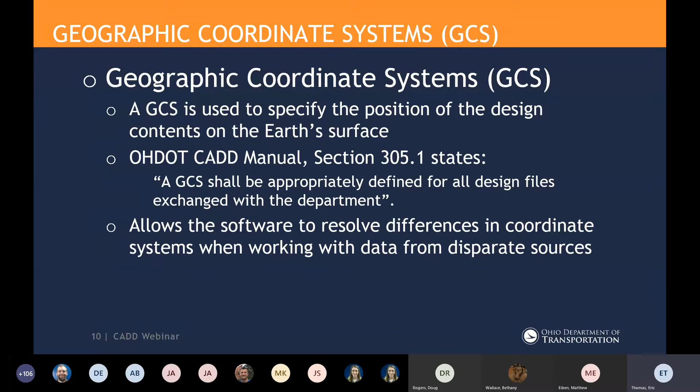If you're not sure about the GCS itself, in the Create Workset application there are three options. There's no GCS, typically used for a project that's been mapped to ground, in which case you'll have to define a custom geographic coordinate system with a scale factor to scale from the grid to the ground. So you have an option for no GCS, Ohio North, or Ohio South.

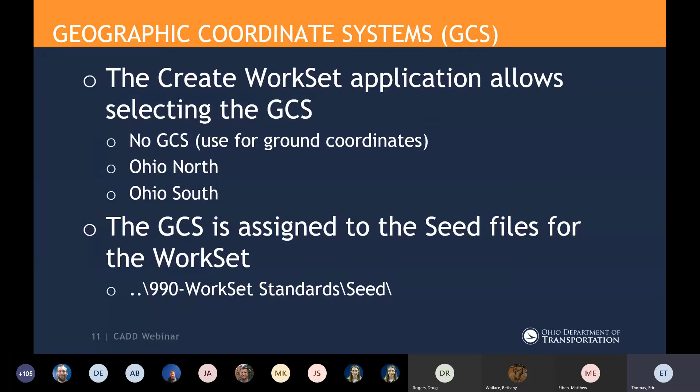When the workset's created, that geographic coordinate system is assigned to the seed files for that workset, stored in the 990 workset standards seed folder. Within ORD itself, under the drawing tab, utilities coordinate systems is where you can review or assign that coordinate system information. The bottom line is if you're not sure about this when creating a workset, communicate with the district survey operations manager before you create that workset.

Get the input from them. Is this going to be on the grid? Is it going to be on the ground? Should I be using the no-GCS option and assign a coordinate system for the ground coordinates, or am I going to use one of the Ohio North or Ohio South coordinate systems?

We just want to emphasize that this is something expected to be done on all the work sets, and then the design files would use the seed file for that work set with that GCS defined.

One thing a lot of users aren't aware of is that once that GCS has been defined, in the view attributes in MicroStation or ORD, there's an option to enable a background map. You do have to have a GCS defined for this to work, and it's just using Bing Maps. I don't know how up to date those maps are, but it's a nice option to have available just to show a quick background map.

You've got an option to show the street map, a hybrid, or just the aerial mapping. Again, that's just in your view attributes in MicroStation or in ORD. And if there's a geographic coordinate system defined, then you can use this function. It's not available without a GCS defined.

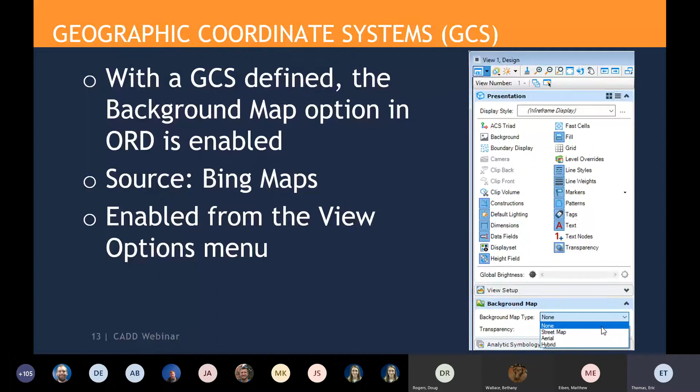So I'm going to shift to creating design files. A couple things we want to talk about here. Again, in our Ohio DOT workflow is where you'll find that Create Design Files application. This is good for inside ProjectWise or externals who may not be using ProjectWise. It'll function inside or outside of ProjectWise.

This is set up to facilitate a federated workflow. By federated workflow, we just mean a united federation of design files here that are all going to be tied together through reference attachments. So federated workflow means we're using multiple design files for our project data.

By splitting this stuff up, we just have smaller files. We don't have a huge file with everything in one file that's going to slow down performance. Of course, MicroStation files are single user access, so this allows multiple users to work on the project, working in different files. If something does go wrong with a file, you're not going to lose everything - you're just going to have that piece of information that would need to be restored from a backup.

When you're talking about federating the files and figuring out what file should I be putting the information in, the various base maps are kind of your roadmap for that. You're just going to look at the available base maps, and if there's a base map for it, that's typically where that information should be stored. And then of course we use references to tie all this information together.

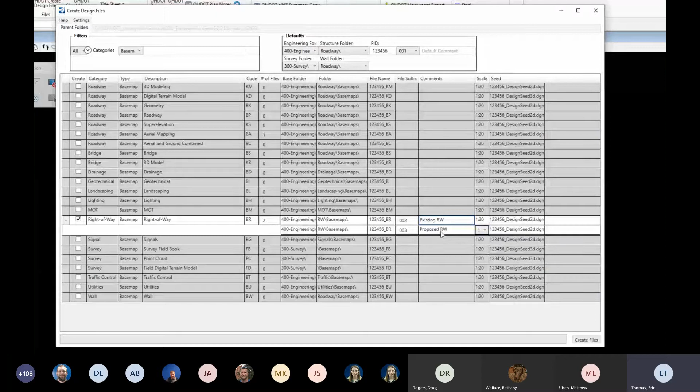The last thing I want to mention is just under settings, there is an open last created file option. So if I turn that on and it creates these two files, it's going to open the last one it created when it's done processing. So it's just a quick overview of a few tips on how to use this dialog to create files, and again, thinking about a federated approach and splitting our information into multiple files.

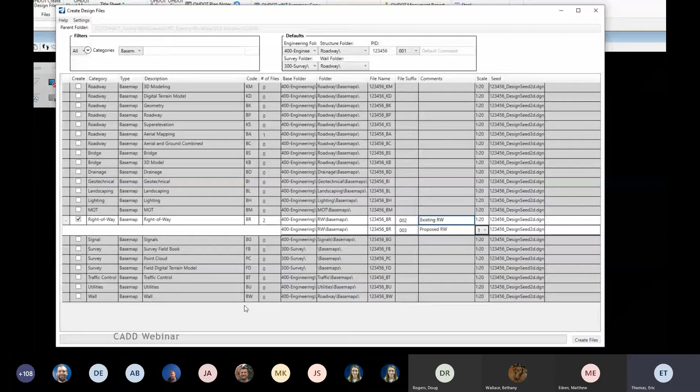So I just want to review a couple of the file types. We've seen a little bit of confusion over what should go in the files. I'm not going to go through every different base map type, but the commonly used file types are survey base map, our field book, our FB file, and that's in the 300 survey base maps folder.

This is going to contain the field survey mapping information, and it could contain the terrain model, just depends on the particular project and whether they decide to make the terrain right there. Or sometimes we see people use the FD file for a field digital terrain model and create the terrain model in that file. That's typically done when you've got multiple sources that you're combining together into the terrain. So you'll make that separate FD design file and then combine those terrains together in that file.

In this survey base map, the intention is that this is the survey mapping. We're not expecting to see alignments, right-of-way, parcels, or any of that type of information in the survey field book file. The alignments should go over in their own files, and right-of-ways and parcels should be contained in right-of-way related files. So the field book is a common file.

The next one I have is the geometry base map, the BK file, and that one's in the 400 engineering roadway base maps folder. The typical recommended convention is one alignment per file. In training, we usually say if you've got just a small project with a couple alignments, it's okay to put them in the same file, but the general convention would be one alignment per file. And again, we don't expect to see any other graphics in that file, just the alignments themselves.

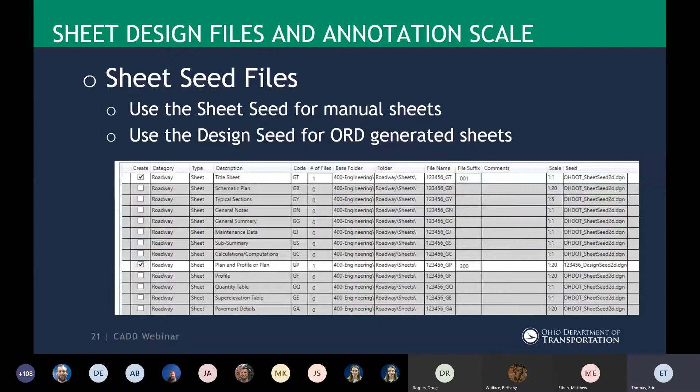One thing that's changed from SS4, SS10 going into ORD in our sheet design file: when you create that file, it only has a sheet model, it does not have a design model. We have had some users ask about that, and there are cases where users wanted a design model. What you need to do is just go ahead and create that design model yourself - it's needed if you need it, and it's okay to do that. But by default, that sheet design file will only have a sheet model in that file.

The other thing is when you use the Create Design Files application in ORD, it does not automatically place the cell border in there for you. That was something we had back in the SS4, SS10 version of the Create Design Files application, but you'll need to use the Sheet Cells application, and I think Matt's going to cover that application.

When I'm creating sheets, the annotation scale is going to be set, at least the initial value, when I'm creating the sheet. Here in this example, I've got the title sheet, and on the right you can see the scales, with a default value of 1 to 1. In general, this defaults to 1 to 1 if it's something not scaled, like general notes or a summary sheet. If it's plan profile or schematic, it defaults to 1 to 20, and there's a 1 to 5 default for typical sections. You can set this to whatever value you're going to use when you create your sheets - if you're doing a 50 scale plan, just change it to 50, and that sets the initial value.

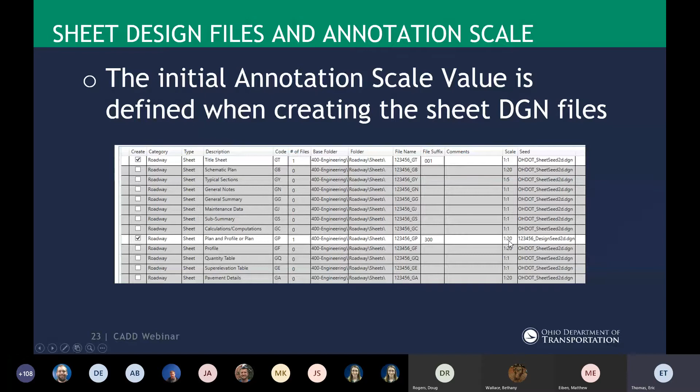Let's talk a little bit about annotation scale. This sometimes is still a bit of a source of confusion, so I've got a couple of videos to review some annotation scale things. Just think of annotation scale as a multiplier, applied to the display of text, dimensions, cells, and custom line styles. So the element size, whenever I place it, is multiplied by the annotation scale, and that controls how large it's displayed in my file.

So when I'm placing elements, I always want to use the base scale. For cells or custom line styles, I always want to use a scale of 1. For text, our base size is 0.14 for text and dimensions, and 0.14 was selected because that corresponds to the size of a 10-point font.

So I have a couple of short videos just to review some annotation options. Let's review our settings when we're placing cells and custom line styles.

I'm in the Open Roads Modeling Workflow in the top left, on the Drawing tab, and I'll find the Place Cell command in the Placement group. So there's our Place Cell command. Notice over here on the right, my drawing scales, my current annotation scale is set to 1 to 20. Annotation scale lock is toggled on.

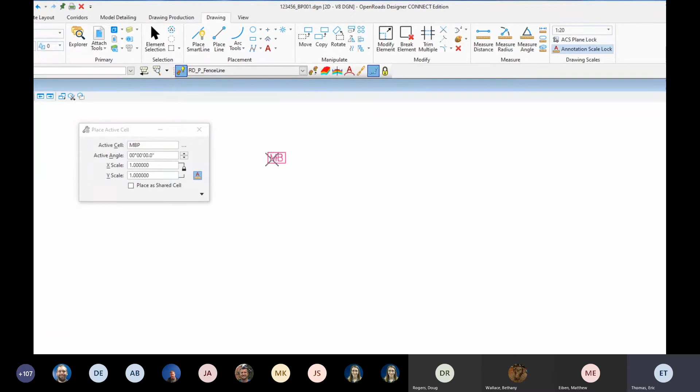So let's go ahead and place a cell. I'm going to use the mailbox proposed, and there's my mailbox floating in my cursor. So just be careful, make sure you have your scale values set at 1 anytime you're placing cells. And then here's the option to turn on or off the annotation scale lock. So I'm going to go ahead and place that in the file.

And now if I change my annotation scale to 1 to 50, we'll see that will resize. So just be careful with your cells, and the scale value should be set to 1, and you should be in good shape if you've got that defined.

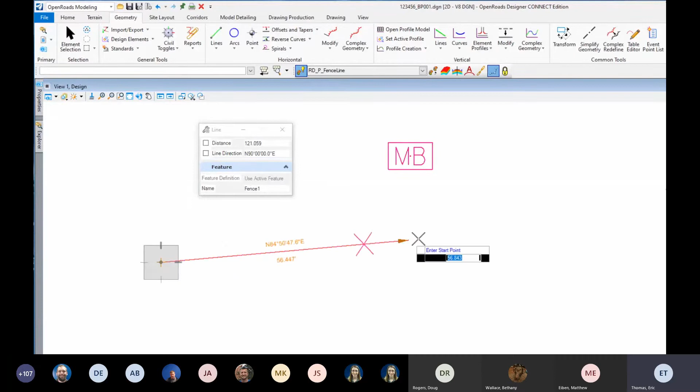Now, if we're going to place a linear element, I'm going to come up here to the Geometry tab and use the Line Between Points command. I'm using in my feature definition toggle bar a roadway proposed fence line feature, and I have that toggled as being the active feature. So I'm going to place the fence line, and it's going to use a custom line style to define the size of the X's along the fence line and the interval between them. This is going to default to a base scale of 1 multiplied by my annotation scale.

So I'll go ahead and place that. What you want to make sure is in your settings, you have your custom line style scale set to 1, or just turned off. And that's going to be found in the backstage.

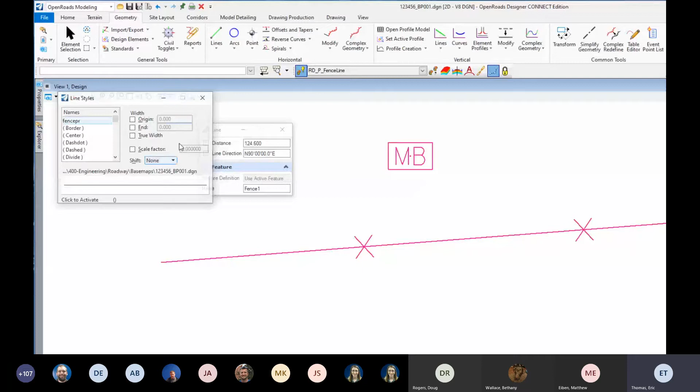So if I go to the File button and under Settings, going to my file, here's where I'll find my line style scale settings, or just the line style settings, and one of those is the scale factor. So you just want to make sure this is turned off and leave that turned off. Let the line styles come in at their base scale, and then let your annotation scale control that.

So back on my drawing tab, if I change my annotation scale back to 20, we'll see the fence line and the mailbox will rescale appropriately for a plan at that particular scale.

And I have a second short video with text and dimensions. Let's review our settings for placing text and dimensions using the annotation scale.

So I'm still in my Open Roads Modeling Workflow, and on the Drawing tab, I can see the Place Text command is available here in the Placement group, but for some reason Bentley did not include the Place Dimensions command here. So I'm going to change my workflow to the Drawing Workflow. In the Drawing Workflow, I'll pick the Annotate tab, and here's my text commands and my dimensioning commands. So I'm going to start with the Place Text command.

So in my text editor, I can see a drop-down of styles, and then the font and the size here. What I want to do is select a text style.

So in the list, there's a bunch of text styles that start with the word label. These were created to be used with a lot of the Open Roads annotation commands, and we just needed some text styles for different justifications. So that's what these were created for. They really aren't intended for the users to select.

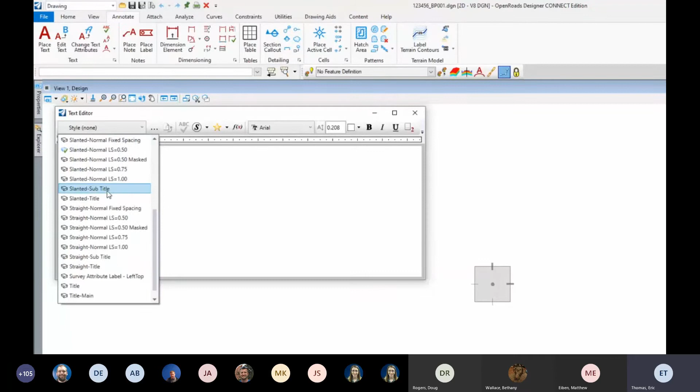What we do have is the legacy text styles that we had in Select Series 2, 3, 4, and 10. So these: slanted normal, straight normal, title, title main, title sub - those are the text styles that you should be using. I'm going to use the slanted normal with a line spacing of 0.5. That means the line spacing is half the text height.

And when I select that, it's going to go to the font Arial, and it's defaulted my text size to 0.14. So that's the size of the text on paper when it's finished, which equates to a 10-point font. So I want to leave that text size alone, I don't want to change that. I'm going to let Annotation Scale take care of the display size of my text.

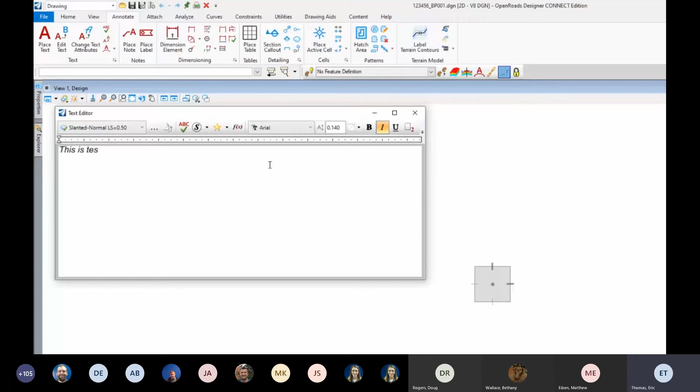So let's place some text in the file. And just go ahead and put that in here. I got to zoom in a bit.

And I'll place a couple lines of text just to illustrate a couple of points. So now when I change my annotation scale, we'll see this resize.

So if I go to the Utilities tab, I'll find the annotation scale or drawing scale settings there. I'm going to change this to 1 to 10, and you'll see it gets smaller, but everything's scaled about the origin of the text. So if I change this to 1 to 50, I'm going to see the text start to overlap.

So it's just something to be aware of with text and placing text and annotation scale, that it's all scaled about the origin of the text.

Okay, now let's take a look at placing dimension styles as well. So I'll go back to my Annotate tab and pick a dimension element command, or just dimension linear. Let's use that one. In this one, I'm also going to pick a style, so there's a drop-down list of styles. And again, there's a couple here with a prefix of underscore LBL, for leader line with terminator.

These two are only used with the Open Roads annotation functions, and those are used just to define the leader line itself. So you shouldn't be using those when you're doing dimensioning. You want to use the legacy dimension styles that correspond to what we had in the previous Select Series software. So I'm going to use the decimal 2 masked slanted dimension style.

And that's going to set all the settings for me. So I'm just going to pick a starting point of my dimension, and then a width, and then the height of my witness line. So again, the dimensions, the size of the arrow, the text, it's all going to be annotation scale aware.

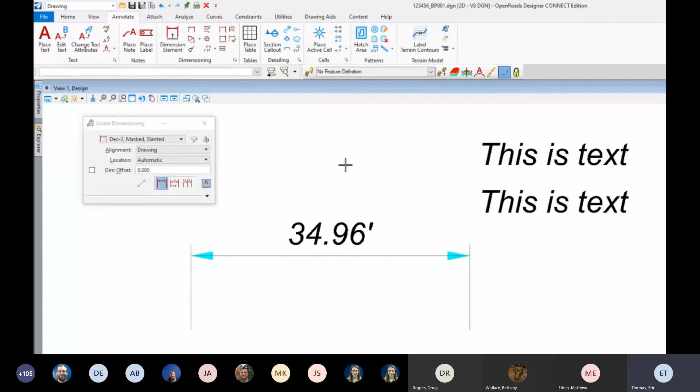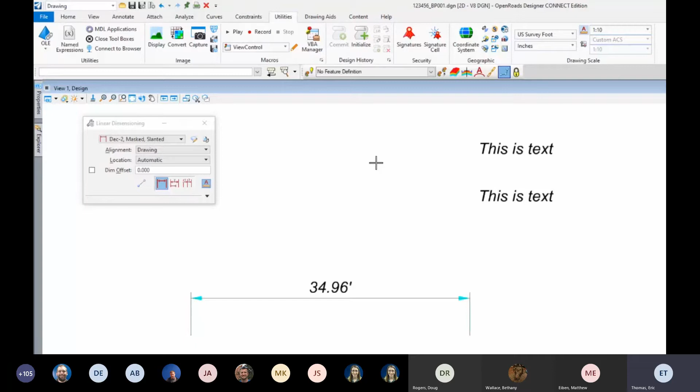So back on my Utilities tab, changing my annotation scale to 1 to 10, we'll see that will scale as well. So we just want to give a quick review over that, just to make sure that everyone's on the same page, that you shouldn't be setting the sizes. You should let the text styles and dimension styles set the default sizes for you, and then Annotation Scale takes over and does all the rest.

Okay, the last thing I want to touch on was just this delete ORD preferences batch file. You can find this batch file in ProjectWise at the location I've got there. For those external to ProjectWise, it's just under the standards, OHDOT utilities and the utilities folder.

What this is going to do is, well, I would suggest you just copy the file to your desktop to run it and run it from there. And it deletes all the preference files for ORD and MicroStation Connect.

So we recommend you use this just anytime something odd is happening. There's been times we've been doing some support with users and just something odd's happening, and we'll suggest deleting the preferences. So this batch file will delete the preferences for you.

I also recommend using this after we update to a new version of the software. I don't think most people are aware of that, but anytime there's an update to a new version of software, I like to wipe out the preferences and let the software restore the preferences from the defaults.

So if you're curious, there's the commands that are run by this batch file. It's just removing some directories related to MicroStation Connect and Open Roads. It's also clearing out Power Geopak preferences and some different things for the subsurface utility software as well. So that's out there in the ODOT standards available if you ever need to just clear out the preferences.

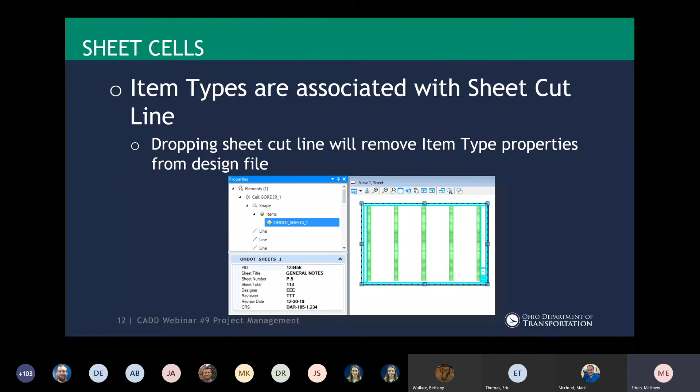The item types are associated with the sheet cut line of the border cell itself. If you were to drop this cut line, it would remove the item type properties from the design file altogether. The screenshot shows selecting the sheet cut line and the properties information dialog, where you would browse to find the item type information. So we'll take a quick look here.

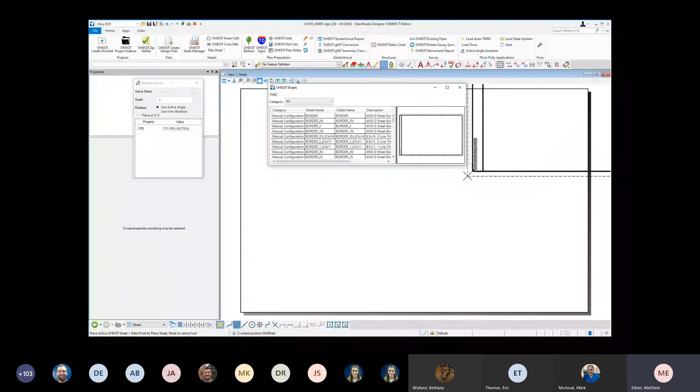I have a new file I've created for my general notes. When I open the Sheet Cells app, you'll see two dialog boxes appear. The larger window is where I'll pick the border cell I want to use, and the smaller one will populate with the associated item types for the sheet border that's chosen. If I expand this dialog, I can view the additional column information more clearly.

You'll notice that in many cases, the app is actually placing two cells, one for the border and one for the interior. For example, we have border cell number 2 and interior cross-section grid. This is a change from the V8i or the ODOT CADD standard, and it makes managing the border cells easier. We went from over 100 border cells down to about 20, and JD discussed this more in the July webinar. We also have detailed videos on the wiki page.

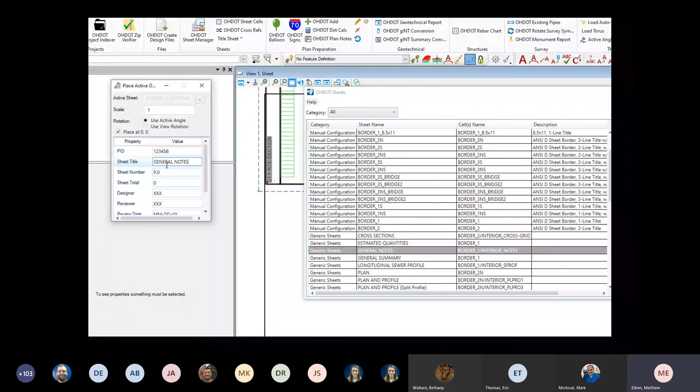So I'll find the general notes border and double click. The Place Active Cell dialog is now populated with the title block information, or title block item type entries, for the sheet. Now I'll toggle on the Place at 0, 0 option, and enter any information I might know at this point. I'm just going to enter in the PID number and change my sheet title, then leave the remainder as is and come back to edit those later.

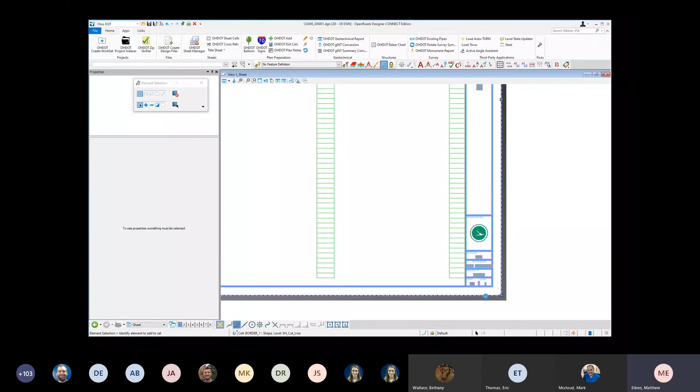Later in the plan development process, you're going to want to edit those remaining fields. That can be done a couple different ways. If I select the sheet cut line, you will notice that the properties for this cell are placed in our properties dialog.

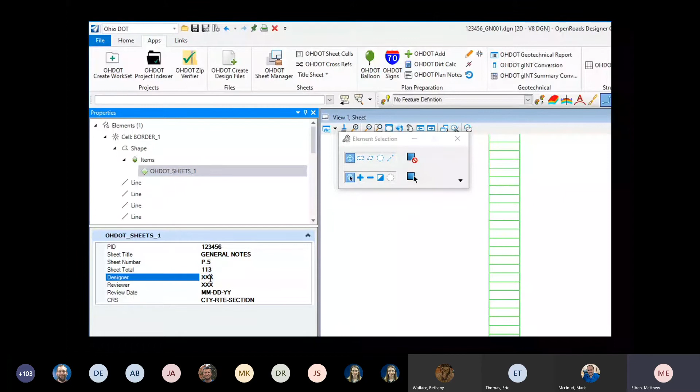If we expand the shape item and then the items field here and select on the OHDOT Sheets 1, you will notice that we have the fields for all the cells, and then you'll see the edits that we had made when we placed the sheet. So here I just want to edit my sheet number and my total, and then indicate that I was the designer here. And again, maybe I don't know who my reviewer is at this point.

As I place those fields, they will automatically be entered as when I click into the next field. So we can watch the designer text change here when I move to the next field. You do not want to try and edit these with a text editor. This will break the association to the item type.

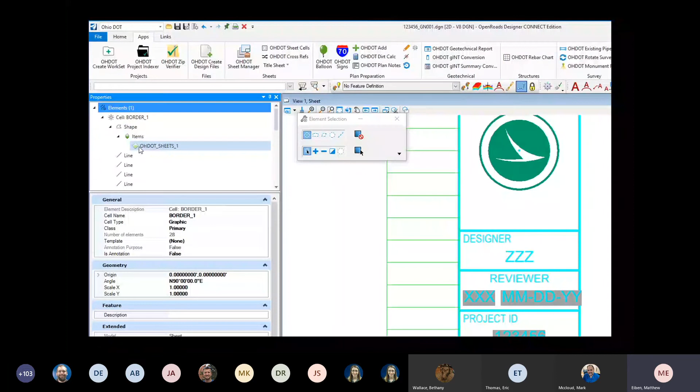So if I select edit text here, and select on this designer field and change it to something other than what it was, now if I come back and review the properties again, we'll see that the original text that was entered still remains as part of the item type, but what's being displayed on the screen is now just simple text. So we do not want to do that. For the remainder of this demonstration, I'll just go ahead and undo this to get it back to where we were.

The second way to edit these is to use the OHDOT Sheet Manager app. This will allow you to edit one sheet or multiple sheets at once with some help from Excel. Again, there are more detailed videos on the wiki page, and you can review those as needed. So let me open the Sheet Manager application.

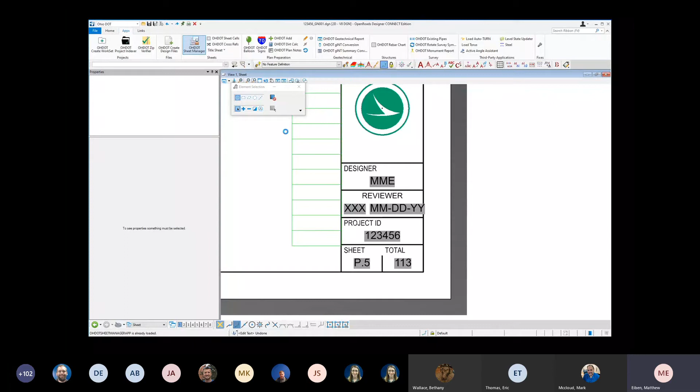And I'll adjust my view here so we can see. Then I'll find my general notes sheet that we were just looking at, and now I want to enter in the remaining information that I left blank.

Notice that these fields do not change as I'm typing these in. I have to click the Update Values button here to make these change.

I can also edit sheets other than the active file that I have open. So if I want to renumber my plan and profile sheets while I have this open, I can do that, update the value, move to the next sheet, and continue on.

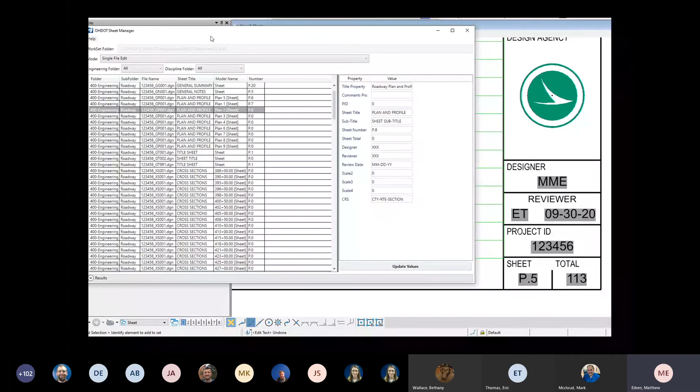If I wanted to make more than those sort of changes, we can use the export to Excel and then import from Excel. You would export this information to Excel, make the modifications you want, and then import them back into Excel. But I'm going to leave it at that for now, and you can review those other videos for editing multiple sheets or bulk edit at your leisure.

Next, I wanted to take a quick look at the cross-referencing app that JD created. This will allow you to use the title block item type attributes to create a sheet cross-reference. For example, in this demo, I'll have a note on one plan sheet and I want to reference another plan sheet. We'll take a look at that here as well.

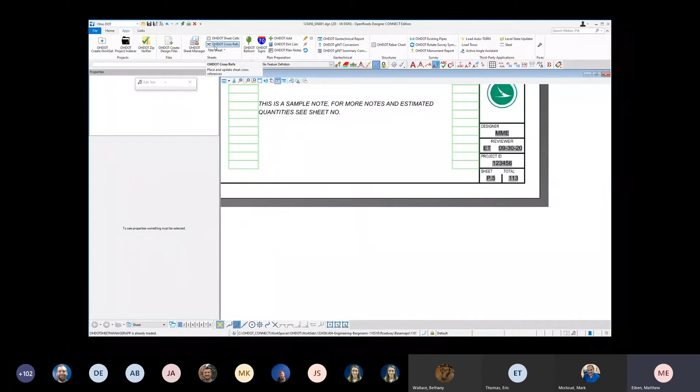I have the same sheet I created previously and I've added a note. Now I'll go ahead and load the OHDOT cross-reference app. Then I'll select the select text element button and choose the text I want to add my cross-reference to. I'll accept it, and we'll notice that it's populated in our cross-reference application.

Now I'll select set up new link, and I'll browse to the file I want to use, my plan and profile here. I'll also need to select the model I want to use, and I'm going to select plan 1. In this example, all of my sheet files are in one DGN.

Then I'll select the property I want to use, browse the list here, and select the sheet number, then select OK and OK again. Now my sheet number item type to my plan and profile sheet is added to my note.

Now, if your sheets get renumbered through the plan development process, you would only need to update the file or files with the cross-references rather than going into manually update each cross-reference.

So if I load the Sheet Manager application here, I'll select my plan and profile sheet 1, and let's say this changes from sheet 7 to sheet 17. I'll update that here, and my sheet number is changed in my list. I can close this application, and for this example I'll use update active file. Notice that the sheet number is changed now to sheet 17.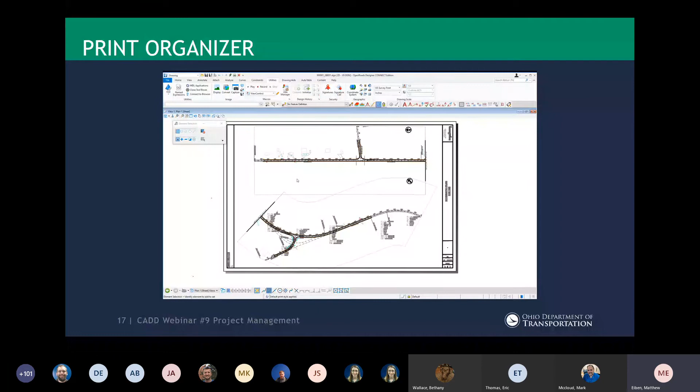As a high-level overview of Print Organizer, we'll look at adding files to Organizer using a pset file and creating a multi-page PDF of the plan set. We'll also take a look at the PDF that is created as a result.

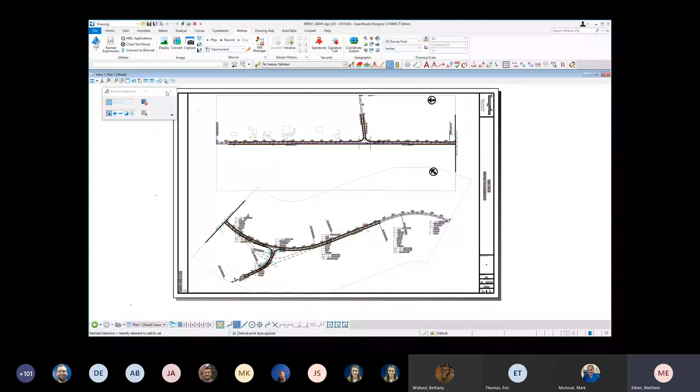So first we'll go to File, then Print, and then select Print Organizer.

Since our projects have a pset file that's created from a seed or template when the create workset app is used, we can simply open this pset file. It'll be located in the 990 Workset standards plot driver folder. If I look at my folder list from ProjectWise, I'm in 990's Workset standards, then the plot driver folder, and the pset file will be named with our PID number .pset. So I'll select that file and click open.

This will check that file out of ProjectWise. If I just browse to Explorer real quick and go to the same folder, you'll notice now I have this file checked out to me.

When the pset is open, you'll see a list of folders organized just like how we would organize our sheets in our plan set. So the folders will create a bookmark in the PDF file. You don't have to use them all. You can change them, add them, or remove them as necessary. That's completely up to you.

But if a folder is not used or does not contain any files to be plotted, it'll simply be ignored as if it weren't there. That way you can leave folders in, such as the general summary folder. Even though it won't be used for stage 1 or 2, it'll still be there when you get to stage 3, and you can simply add in your general summary files to be plotted then, without having to recreate that folder later. So now I'll add the files in my project using the Add Files icon, and then selecting Add.

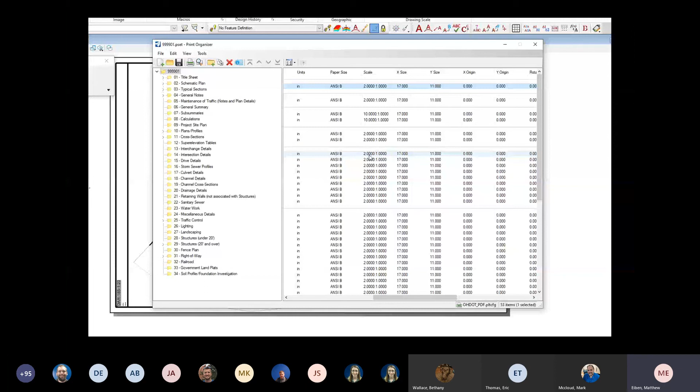Now I can also scroll across here and look at all the different fields, and just do a quick check to see that my scale is correct for the size I'm using. In this case, 11 by 17, and because our sheets are all basically at a scale of 1 now with the references scaled to fit, the scale will basically be 2. Whereas in the past, this would have been a 20 scale sheet, and if plotting at 11 by 17, this would have shown up as a 40 scale drawing.

So I'm going to stop there with this demo. The training guide will go into more detail on working with the PSET files for things like changing the print style or updating the files later. But for this demo, I'll stop here, and I'm going to go ahead and create my PDF.

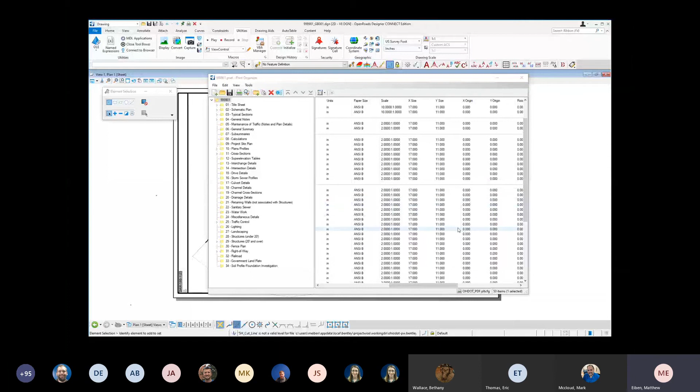To do that, I'll just click on the print icon. And now I'm prompted for what location to save, or my destination folder, where I want to save my PDF file. One thing I do want to check too is my print range.

Do I want to print all the files or just the files that I've selected? You may find you have a situation where you just want to print your plan and profile sheets. So you could select those in your window and just print those particular sheets instead of printing everything.

So here I'll select all, and I do want to submit it as a single print job. I have an option to create separate print jobs where it'll create a PDF for each individual sheet, but I just want one PDF, so it'll be a single print job.

And now I'll select my destination. I did go ahead and fix this folder of 000 admin - I fixed this in our configuration, however I did not fix it in this project. So I just forgot to do that before setting up this demo.

So I'm just going to browse to the correct folder here in ProjectWise, and I'll set my folder to be the 950 reviews folder, and I'll leave my PDF name as the name of my PID number.pdf. And I'm going to toggle on open print after creation, and then I'll hit OK.

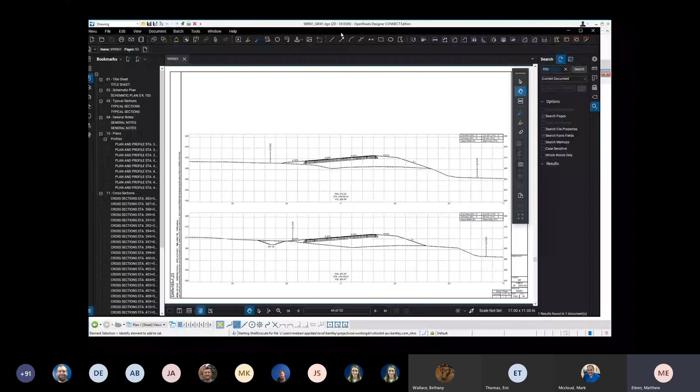Okay, all of our files have been processed and our PDF was created. Let me go back to the beginning here. And we'll see when we look at our bookmarks, we can see the folder names that we had, and we can collapse those, and we'll also see the sheets that were in each one.

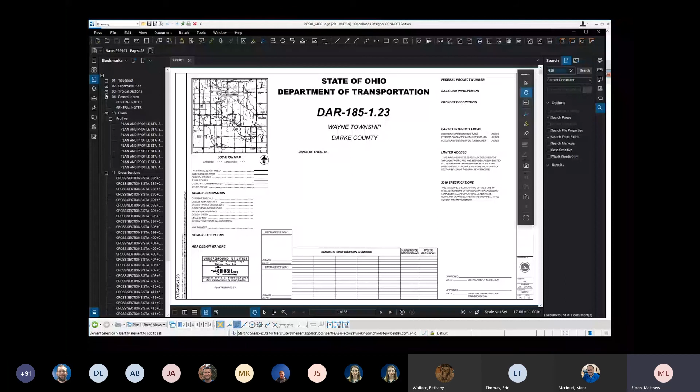So we could click on a bookmark and just jump right to that sheet. And you also see that those bookmarks are the same names as what was in our print organizer.

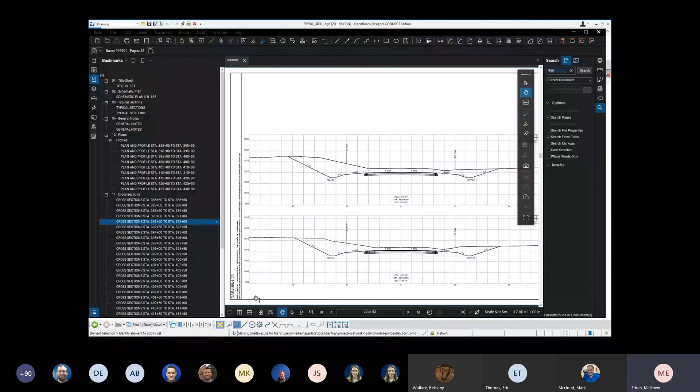So I had this file automatically open for us when it was created. If you didn't toggle that on, you would just have to browse back to ProjectWise and find that file in the destination folder that you selected. In this case, we selected 950 reviews, and here is our PDF file.

When it does open it automatically, it's just going to open it as read only. So you will see the pencil here, meaning it hasn't actually checked it out to me. It's just kind of opened a temporary copy.

If I needed to add some files or insert sheets into that, and I wanted to use Acrobat or Bluebeam to do that, I would need to go ahead and make sure I opened that or checked that out as a writable file, and I could do so.

So now that we're done reviewing our PDF, we can take a look. If we go back to the Worksets folder and look at our pset file, we do still have that checked out. We want to make sure we've gone through the effort to organize this as we want, so we want to make sure we hit the save button and save those changes so we can come back and do that later.

The one thing I wanted to point out here is that when you do close the print organizer dialog, it doesn't really let you know, hey, what do you want to do with this file? Do you want to check it in, free it, or cancel? So when I close this, it automatically will go ahead and check that pset file back into ProjectWise for you, so you don't have to remember to do that.

Whereas it's slightly different than working with a DGN file. Once you close it, it will prompt you or ask you to check it in.